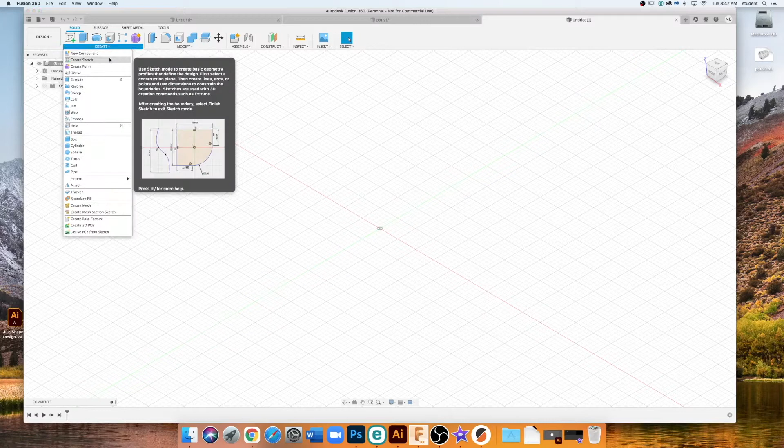So first thing we're going to do is create a sketch. My circle is 3 inches in diameter. I know some of you did something a little bit different, so just make sure you have the right dimensions in here. And then I'm going to come up here to offset, clicking on this.

I'm offsetting -0.25 because the end mill I used to cut this out was 1/4 of an inch, and putting a 0.25 outline into a 0.25 slot is a really tight fit. So this is something you may want to play around with, just like 3D print this component and then do the rest of it afterwards. So I may even just go ahead and say, actually I'm going to do 0.245.

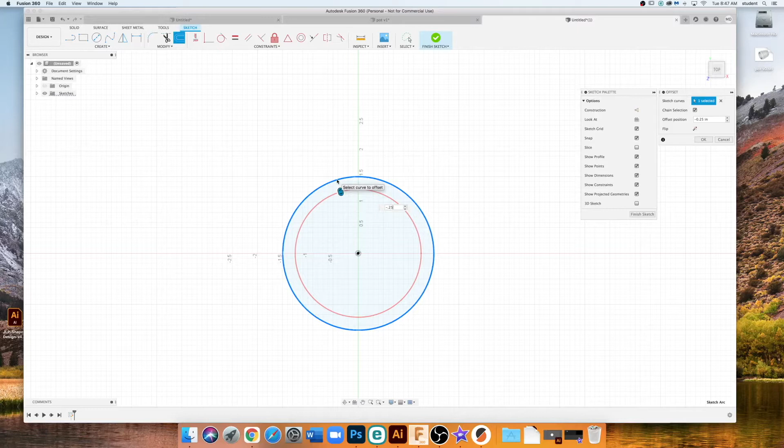So now I'm going to extrude this, and again, this is something that you may have done differently than me. So I did 2 passes and took it down 1/2 inch. Maybe you just did 1 pass, maybe you did something totally different, but you should try and measure before you get too far into this.

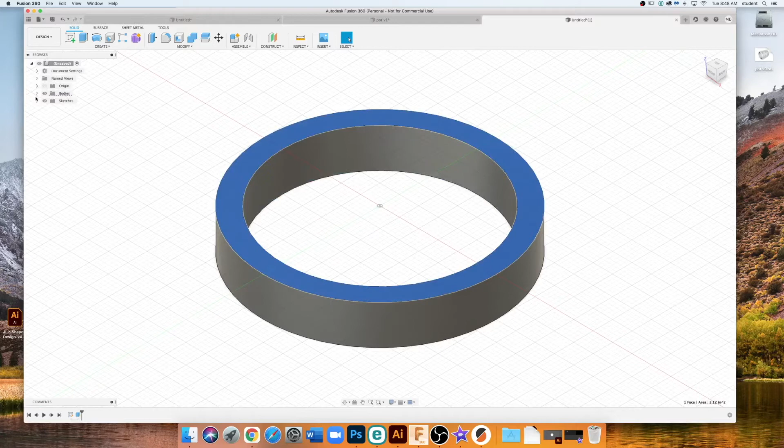And then over here, I'm going to join. Press OK. Now I'm going to select— first I should probably unhide my sketch over here, and I'm going to go to the top view.

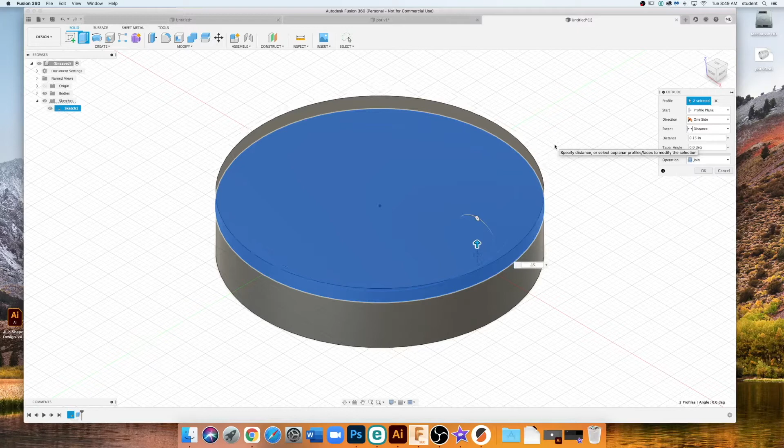I'm going to select this inside part, my outside part, and I'm going to extrude this like 0.2 inches. And this is again a little bit up to how you would, maybe not 0.2, maybe like 0.15. And this is just the base, joining, good.

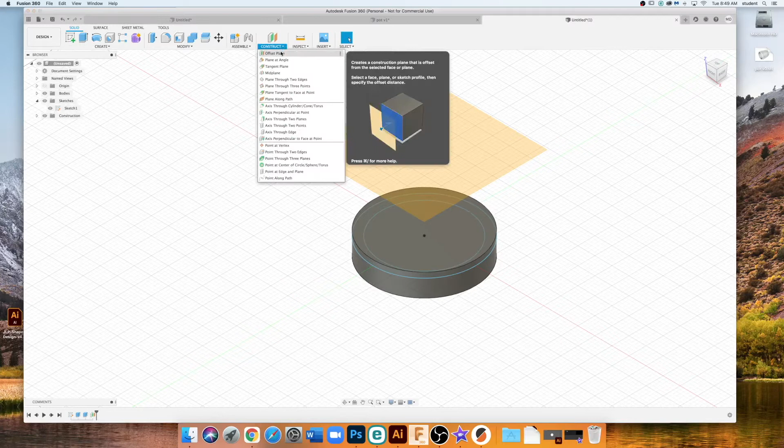Now we're going to learn how to use an offset plane. I'm going to make my first offset plane on this circle, and we're getting to the point where we're deciding how tall you actually want your pot to be. I think I'm going to do like a 3.5 inch tall pot, so I'm going to make this first offset plane go to about 2 inches. And then I'm going to make my next one go to 3.5 inches.

Now I'm going to create a sketch on each of these planes. So on this plane, I've decided that I want my pot to kind of go out a little bit, to be like a little bit more bulbous in the middle. So I'm going to create a circle, and it's just going to be a little bit bigger than my 3 inch diameter, so maybe like 3.25.

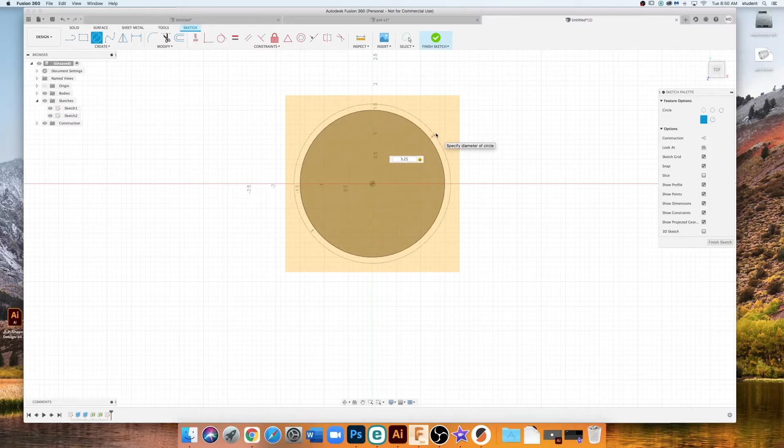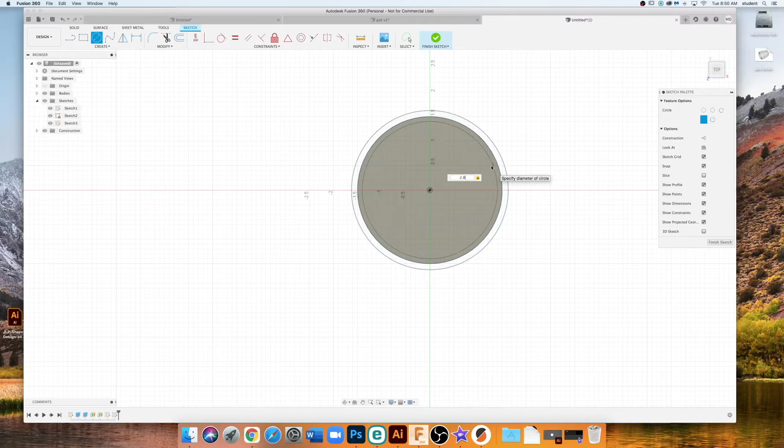Finish sketch. Then I'm going to create another sketch on my top plane, and this one I'm going to do another circle. You could do different shapes here, like you can get really creative with this, but I'm going to do another circle, and then I'm going to do 2.8 and have it kind of taper in a little bit. Finish sketch. And now I'm going to loft these.

So create, loft. And the order that you click on these does matter. I'm going to be joining. So click on this one, middle one, top one. And you can see how it's, you know, like a little bulbous right there.

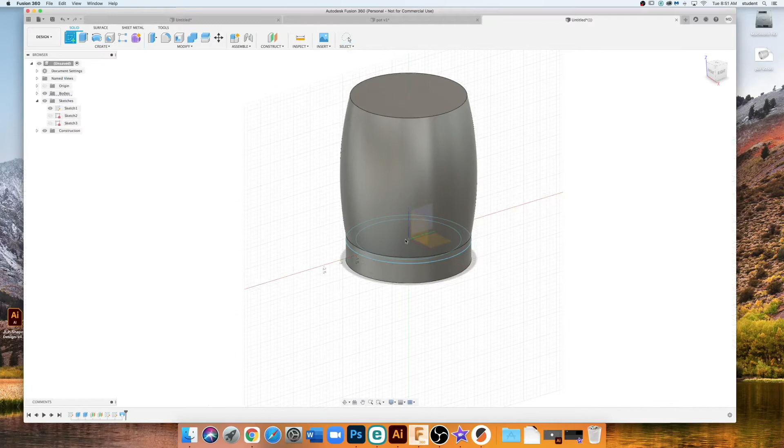Okay, now I'm going to create a sketch. And this part gets a little tricky, so you may have to kind of finagle around with this. Oh, wrong side. So I'm going to just go down here and scooch over. I do not need this. Okay, so let's try that again. So I'm going to create sketch. I'm trying to click on that.

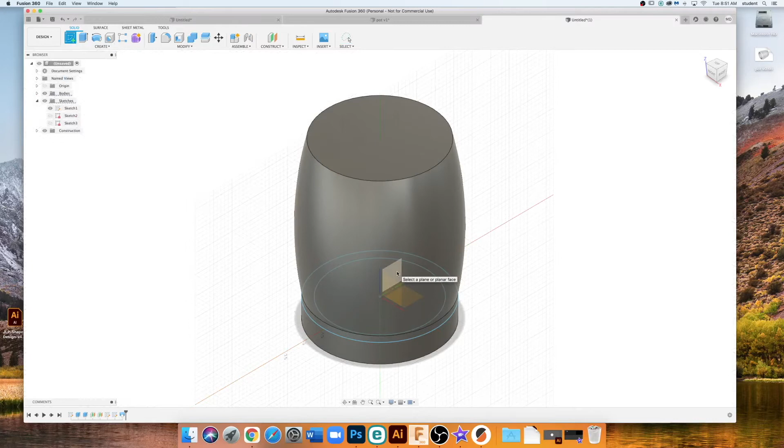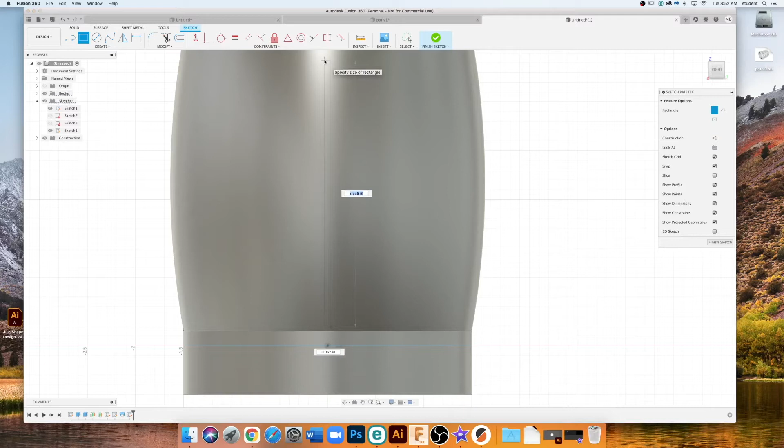Good. Now what you do right here is going to determine the kind of pattern you're going to make, so this is where you'll be getting a little bit creative. So I just want to do a rectangle, I think. I'm going to come up a little bit, but not too far, like right there. And that looks pretty good. Finish sketch. Let's see how that looks.

Yeah, so actually it's not quite tall enough, so I need to edit that. So I'm going to right click on this, edit sketch, and I'm just going to bring it up. I want it to be a little bit taller.

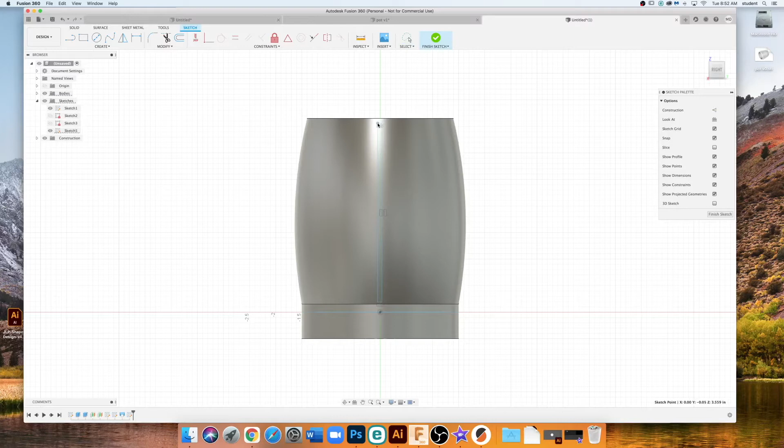Yeah, that's pretty good. Finish sketch. Now, as you can see, my sketch is in the middle, and I want to bring it out.

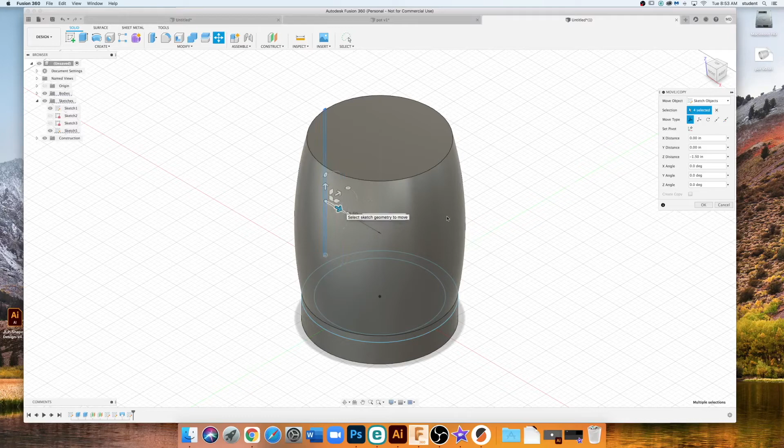So I'm going to click on the hotkey M, and it says sketch objects, which is what I have here. So I'm just selecting all of the parts of my sketch, and then I'm going to move it. And just gonna check and see. Yeah, so it needs to move out just a little bit more, and that's good.

Press OK. So now my sketch is over here, and I need to extrude it. So I'm going to click on it, and I'm going to use the hotkey E for extrude. And then we need to pay attention to this little panel, these options.

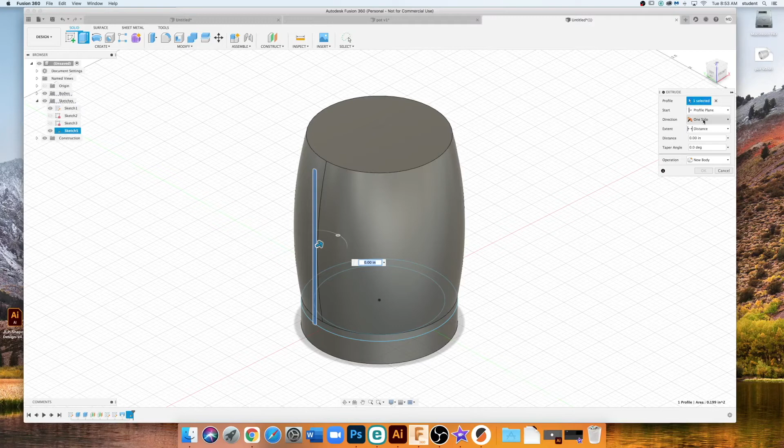I want to extrude it so that it intersects, like it becomes part of this. So I'm going to change this from cut to new body, and I'm also going to change this to object. So then I have to select on the object. Now you can see it's just to the object, which is what we want.

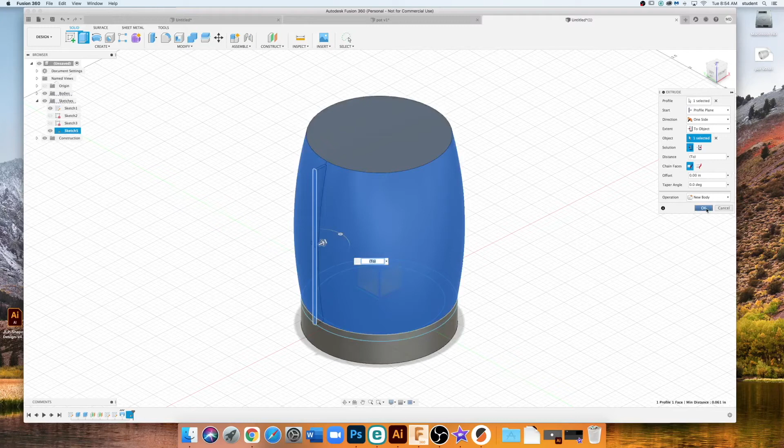And then press OK. Now this is the point where, if you wanted to edit this three-dimensional form, now you could. So I am going to do that. I think I'm just gonna fillet or chamfer this side right here.

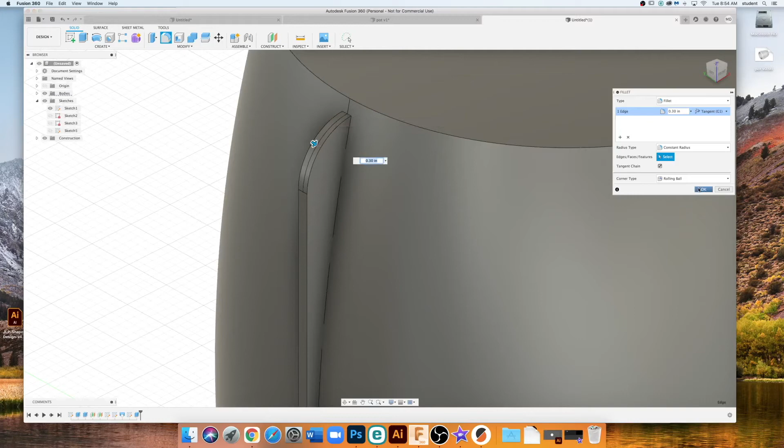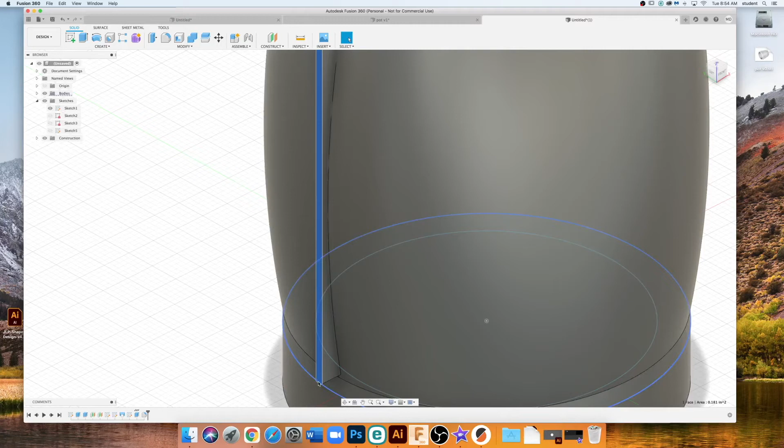And I'm gonna do the same thing down here. And it's kind of hard to see with all that going on, so I'm just going to hide that sketch.

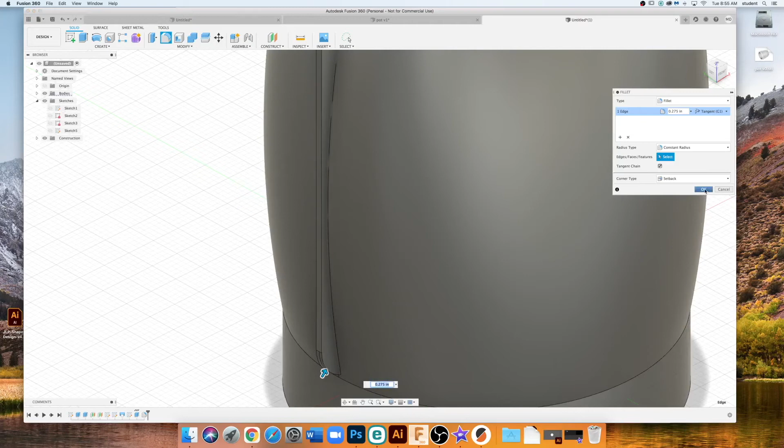And fillet this one. Yeah, looks pretty good. And you can change even the type of fillet. I think that looks good. And then press OK. So now I have this little object hanging off of my pot.

So this is where we're going to create the pattern. So click on pattern, circular pattern, and then you're going to select the body that you're trying to create the pattern of. So I'm clicking on this.

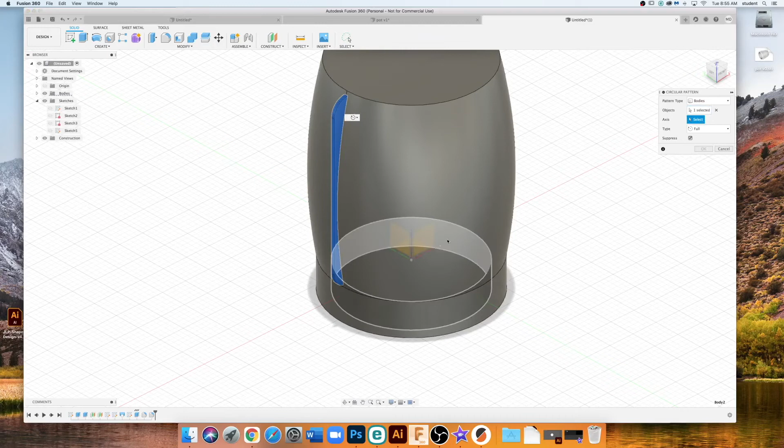Now select the axis. This is the axis I'm doing. And then I'm going to do like 30 of these. And then press OK. And so there is my pattern.

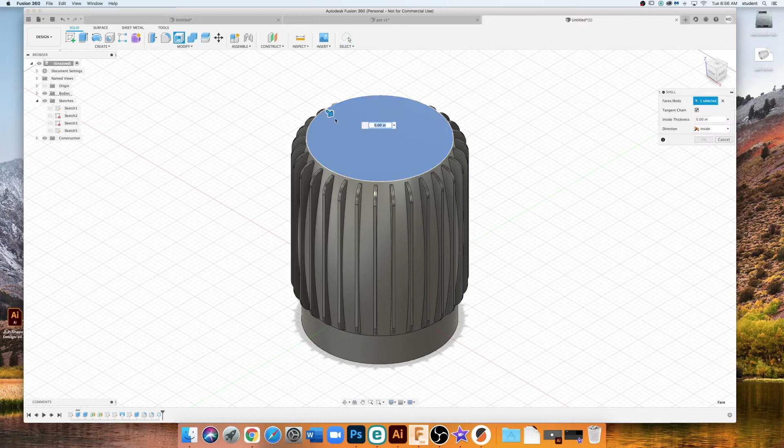Now, this is looking pretty cool, except for I can't put anything in it because it's not hollow. So I'm going to change this and shell it. And that looks pretty good. Press OK.

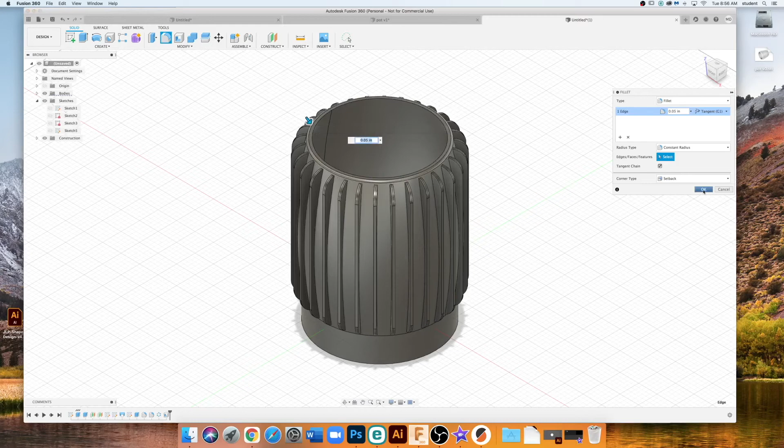And then I'm going to fillet this as well. Just like that. Press OK. So now this is pretty good.

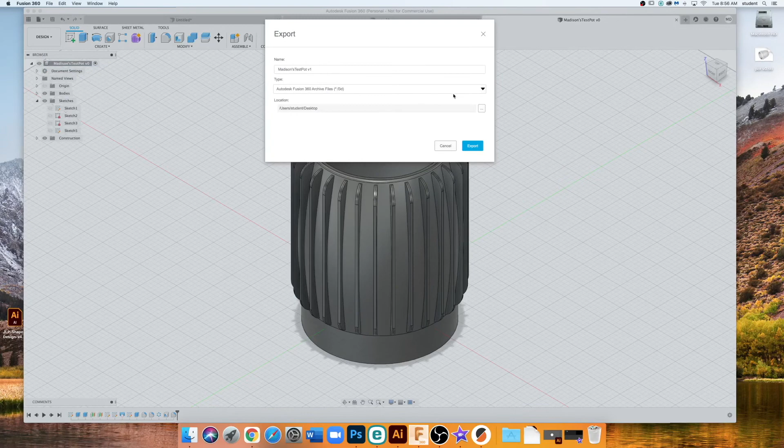The next thing you're going to do is export this as an STL. So go up here, File, you need to save it first. And press Save. And then over here, File, Export, STL, and then this can take a little bit of time.

All right, once this is complete, you can click on Show in Finder and then right-click Open with Prusa Slicer. Once you're in Prusa Slicer, this is just where you need to start figuring out your settings and how much time you're gonna need to reserve.

So this is something that could cause your print to fail if you don't have supports, but if you do have supports, it could take extra time and you'd be wasting it. So this is kind of up to you to see how this goes.

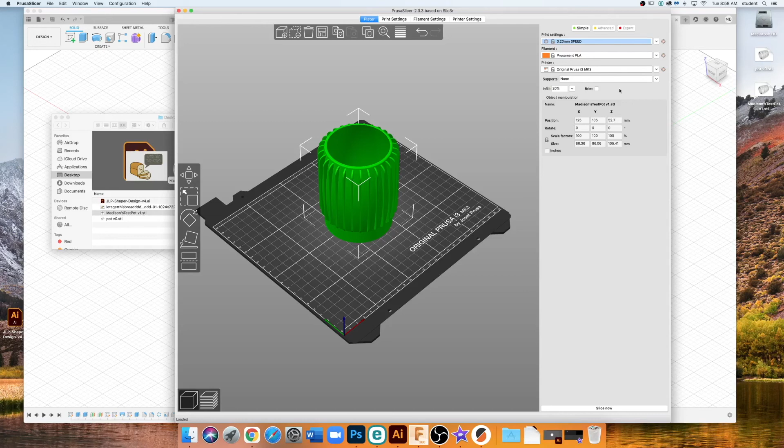I'm actually going to change this to 0.2 speed, and I've got my PLA. I'm using Ray, which is an i3 MK3, I believe. No supports. For infill, I'm just going to do 10 and then slice.

This is telling me it's going to take about 8 hours, basically. And what you're looking for here in this mode is to make sure that this is actually printable. So I'm just gonna go through each slice so you can see that infill in there. And then we've got that base right here.

That looks good. And this is the part I'm saying, like, this is clearly just gonna be printing, once it gets to this layer right here, it's gonna be printing in midair. So it could fail, but mine didn't.

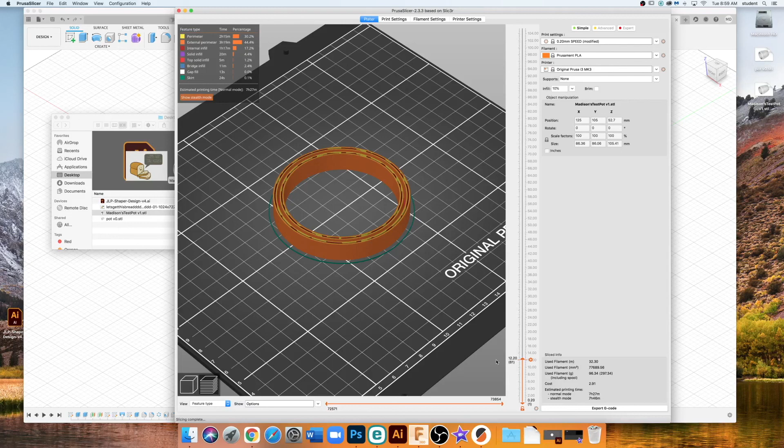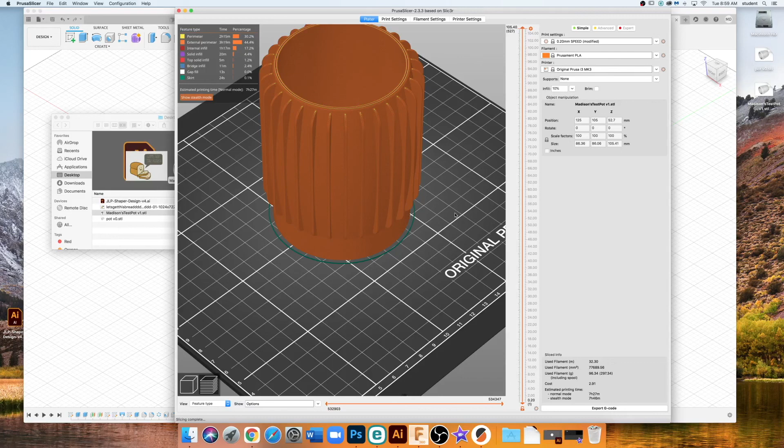So could be a printer thing, could be that I just had a lot of luck that day, I don't know. But anyways, from here, you would export the G-code, and the Prusas read SD card, so you could just do this once you get to the lab, but I definitely recommend checking out how much time you're going to need before you reserve your printer.